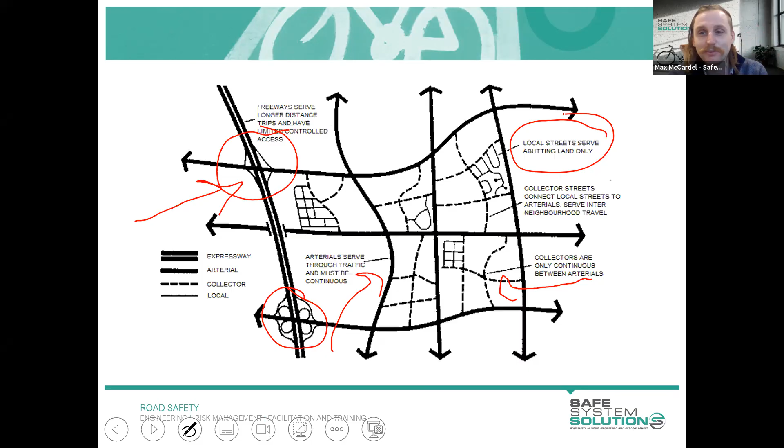That's just another step down, and they provide more connection to local residences as well as inter-neighborhood travel. And the final is our local streets. So we have this general hierarchy, which you can see copied and pasted across basically every capital city and township that you visit. This kind of philosophy has been applied across the board, but the town of Houten has kind of flipped this, because generally this classification is focused on motor vehicles, as the primary consideration. Houten went with a different approach.

We've also moved into this space of movement and place. For those that haven't heard this concept, I won't go into great detail, but the principle is that roads and our network have two key functions. One is movement - the movement of people, the movement of goods. But the road network also has this place function - it's somewhere people actually want to congregate, spend time, and enjoy their time while being there. So it's setting up these two different functions for the road reserves.

This is actually taken out of the Transport for New South Wales movement and place document, but there are other jurisdictions who have produced similar reports. It's this idea that Houten has really excelled at, where we're considering at a first point of view our vulnerable road users - pedestrians, people in wheelchairs, mobility scooters, cyclists, also motorcyclists. If we put them at the forefront, how would our road network actually look? Second to that would be public transport, then heavy vehicles, connected or autonomous vehicles, and right at the end, personal vehicle use. So it's flipping this idea that we need to cater for personal passenger vehicles first, and then everything else can follow.

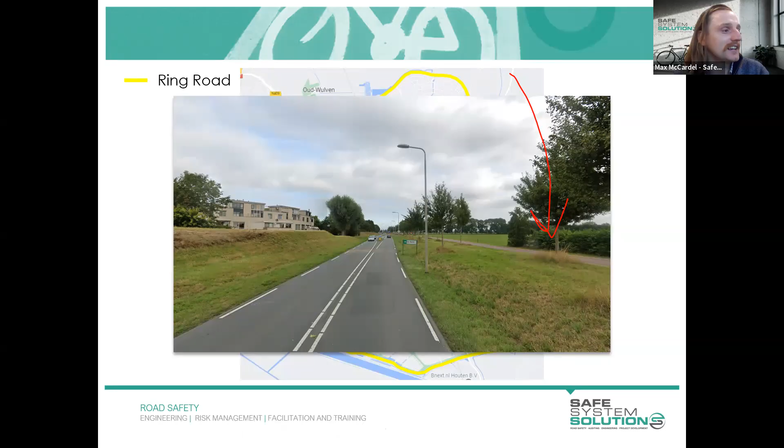And this is where things get a little bit more interesting. I'm just going to focus on the northern section because it's quite a big town, and I'm going to pop in some extra lines for you to consider. So what I've noted here as permeable barriers - it's permeable in the sense that cyclists can pass through these and pedestrians can pass through these barriers.

However, motorists cannot. So the first one I highlighted is the railway line I mentioned before. There are only two opportunities where motorists can travel past that railway line—nowhere else can they cross it. Similarly, there are parks and rivers which provide physical separation between different localities within Houten. Cyclists can travel through them quite easily; it's quite permeable, but not the case for vehicles.

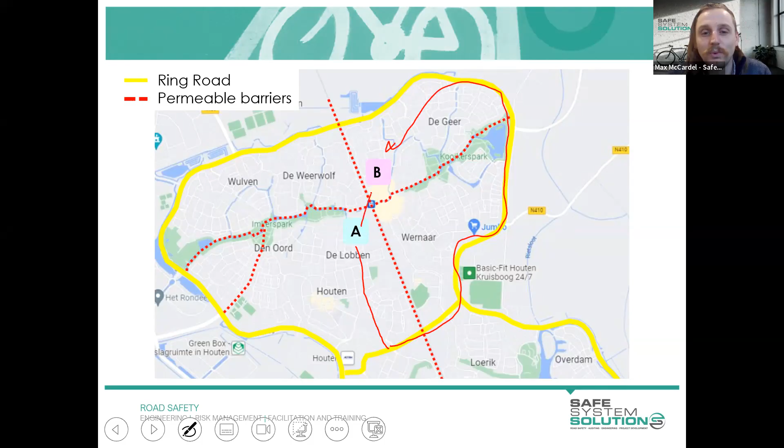What that actually means in practice, if you take point A and point B as I've added here, if you're a motorist, you can't travel the shortest distance possible as the crow flies—you have to head around the ring road and then to B. Whereas if you're walking or cycling, you can head straight there. That's the idea of these permeable barriers.

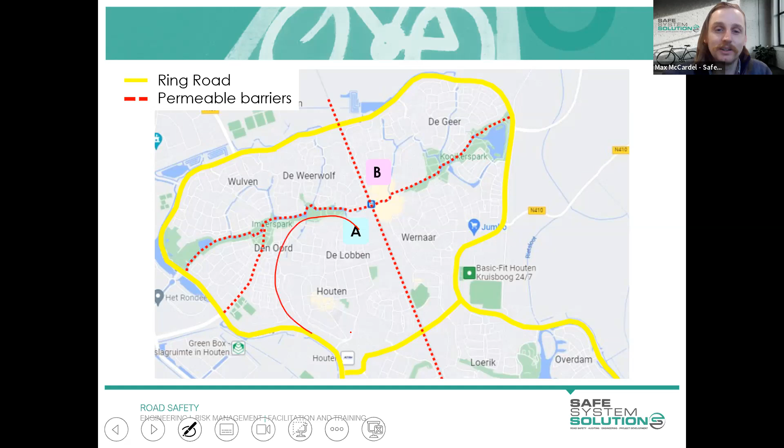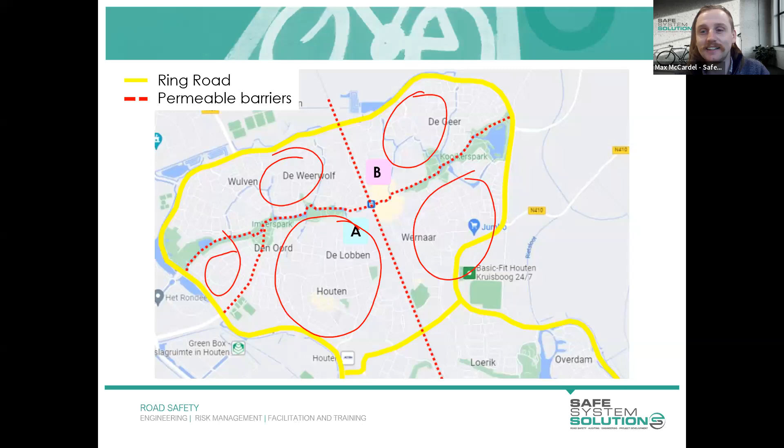You've basically created distinct little districts within this township, and you can travel within your district in your motor vehicle. But to get to another district, you have to go onto the ring road and take an interchange off there. What this has created is it makes it less attractive to get in your car, because it's likely to take you longer—you have to find a park, get on the ring road, there could be congestion and all those types of things. So you're much more inclined, if it's convenient, to walk or cycle than to get behind the wheel.

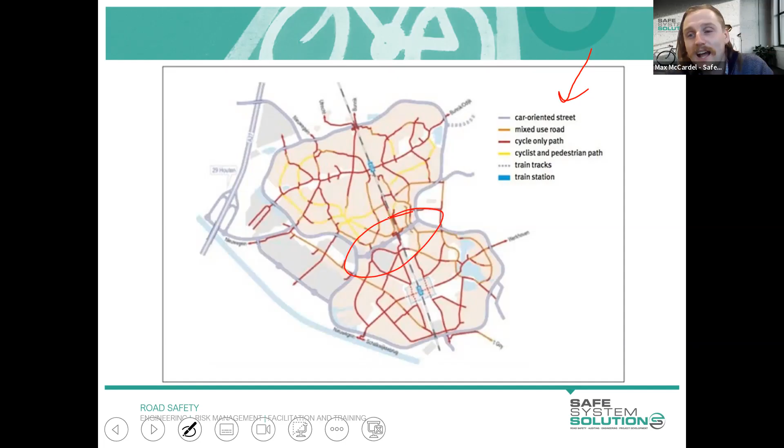The overarching map for this township looks something like this. We know we've got the car-oriented street, which is the ring road, but everywhere else is basically designed to get as much pedestrian and cyclist activity as possible. They did nominate this one ring road that also cuts through the middle of town, but anything other than that focuses on pedestrians and cyclists. I'll show you how this actually works on the ground.

Bollards do at times present a risk for cyclists, but that's a topic for another time. That is basically how these districts have been managed to be separated, so you can't have that inter-travel between the districts.

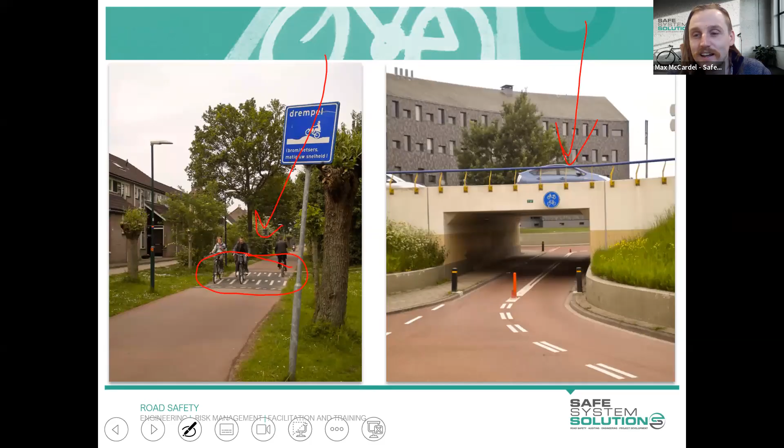That's grade separation. This example is a little speed hump installed on the bike path, because they allow e-scooters, e-bikes and motorized scooters on the bike paths. My Dutch isn't too good, but I believe the sign says to slow down if you're on a motorized bicycle or similar.

Because there are these humps in there to slow down operating speed, similar to how we'd install local area traffic management treatments on our road network, Houten is doing it on their bicycle network. There's about 129 kilometres of cycle tracks within Houten, so it's a significant amount of area set aside for this.

We've got a grade separated roundabout here. So once again, just an example of not having to bring cyclists and force them to interact with general traffic, just keeping them away from the carriageway and creating their own network, which doesn't rely on constantly interacting with heavy vehicles or much larger motor vehicles.

I also wanted to mention that within their local street network, there may not necessarily be those off-road, separated bike paths. So what they've done instead is create really low speed environments. Generally, the speed limit throughout all the residential streets in Houten is 30 kilometres per hour, so as soon as you enter the precinct, it's 30 km/h.

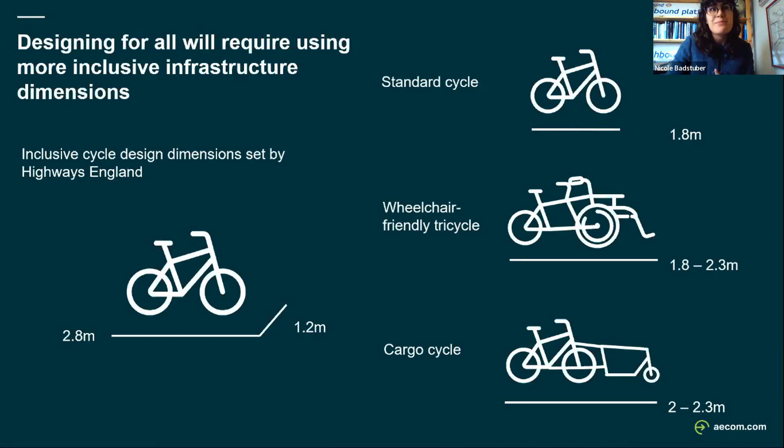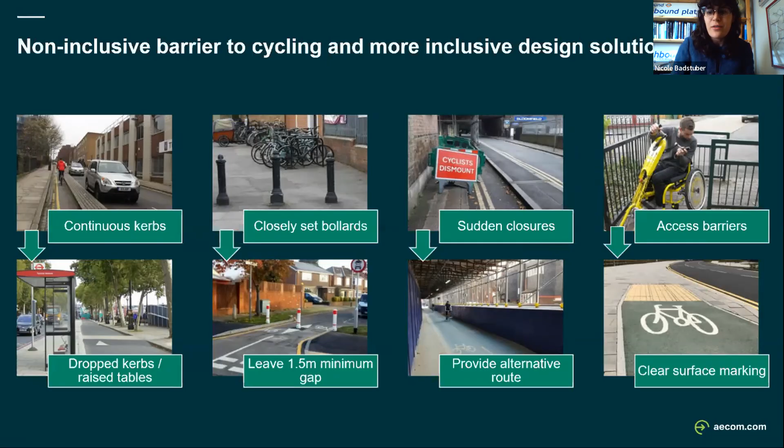So that is all from me. If anyone would like to talk about these topics more, do reach out.